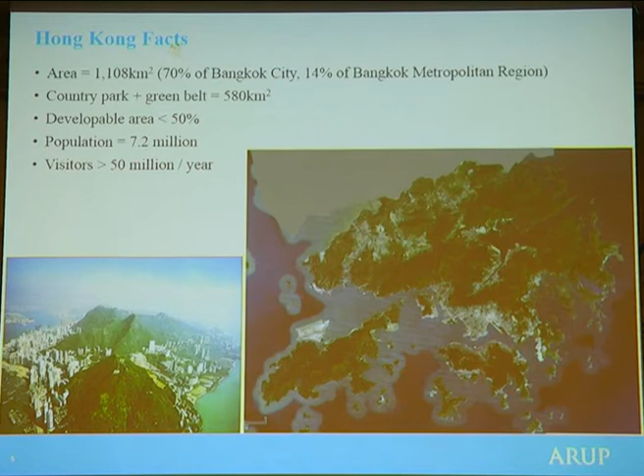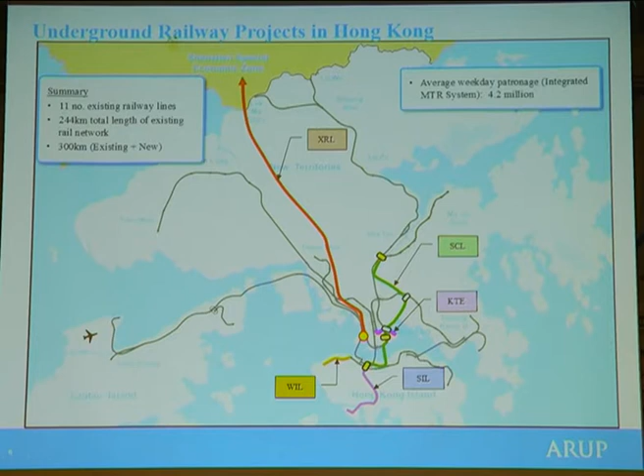Given all this factual data, many developments need to go underground, right? At the moment we have railway systems in the gray line, and currently we are building new lines like the red lines and green lines - they have different names, but these are new railway developments and they are all underground. So major infrastructure is pushed underground - road tunnels go underground, and also some storm drain tunnels, like the Malaysian one, also go underground.

In terms of building projects, Hong Kong is very small, so the government releases land bit by bit every year. It's only about 33 hectares per year, but it's a small place, so this land is divided into different sites around the territory, with many sites coming from this 33 hectares.

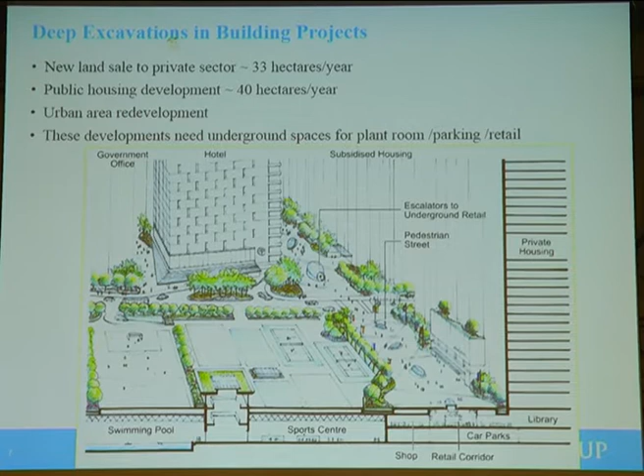The government also promotes public housing, which is around another 40 hectares, and they regenerate new developments from old districts, knocking down low-rise houses to build high-rise ones. Altogether, it's roughly about 80 hectares per year.

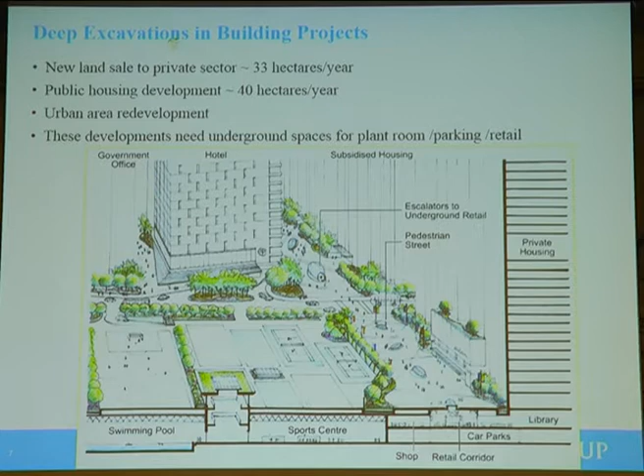For these new developments, most contain underground space, for example car parks, plant rooms, and in busy districts, commercial usage like retail. All of this requires underground construction. In my paper, I showed some common types of excavation works in Hong Kong.

I think the most common one for shallow excavation may be the sheet pile wall, steel sheet piling. In Hong Kong we use a lot of steel, for temporary works they all go with steel. Sheet pile walls have the beauty of high strength compared to the steel weight ratio, so you get very high strength with very little material. It also has the function of reasonable seepage cutoff.

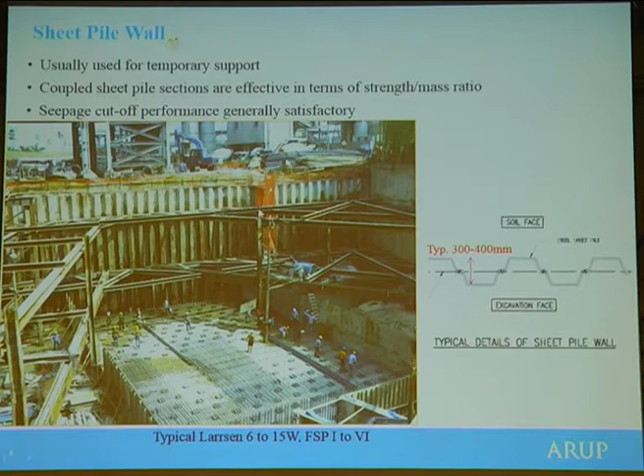For example, this development is near the seafront, and using sheet piling, even with sandy material, provides reasonable seepage cutoff, so you don't need other measures to stop water flowing in. The water table at the waterfront is very high, as you know. They normally drive it in by hammer, pitched by small hammer or by vibrator.

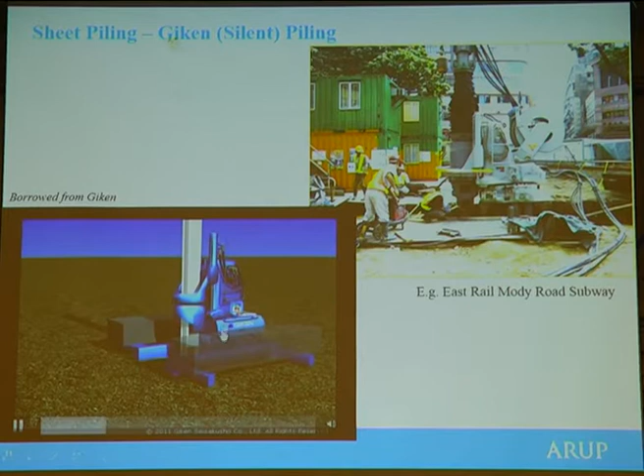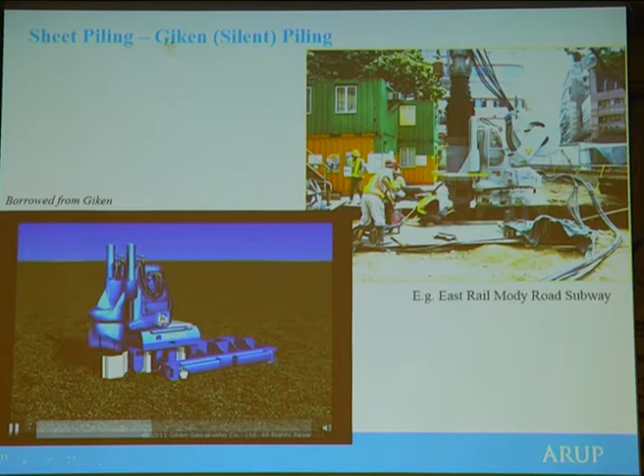In more recent years, this kind of silent piler, invented by the Japanese, has become more popular, particularly for infrastructure in urban areas, because it causes little vibration. It utilizes the reaction from the earlier installed sheet pile - it has clamps, several pairs of legs that can clamp against the installed sheet pile, like this one, to provide reaction to press the upcoming sheet pile into the ground.

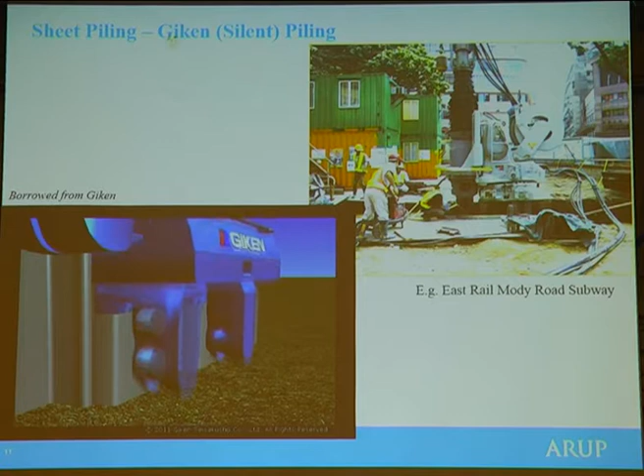It has the beauty that it can be installed in narrow sites. It's also very static - it's just pressed in, it doesn't require any vibration or hammering action. So this has become more popular now in Hong Kong for major infrastructure in urban areas, for example, this kind of site next to old buildings in busy districts.

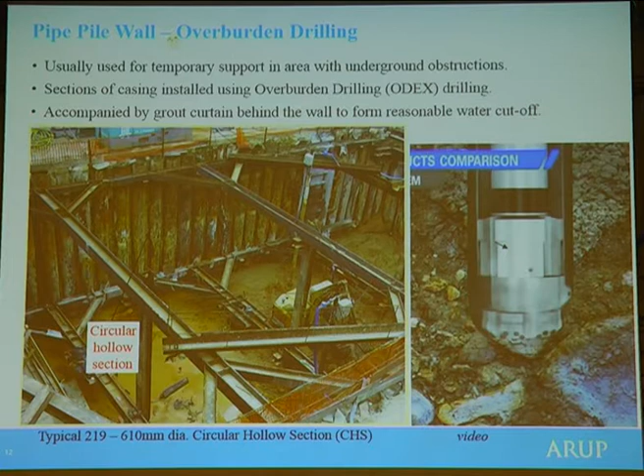Because of the ground conditions, I think the steel pipe wall is perhaps another very popular system in Hong Kong. It's a circular hollow section of steel, brought down by a drill bit through eccentric drilling, so the hole forms slightly bigger than the casing, and the drill bit brings the casing down. This has the beauty of overcoming obstructions like corestones or boulders in the in-situ material, so it's particularly useful in hilly terrain areas.

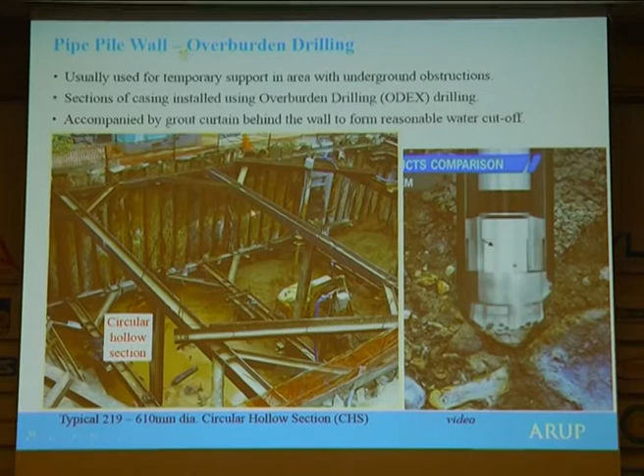Nowadays we use more advanced techniques like the ring bit. Apart from the drill bit itself, the ring also helps to drill - it's attached to the casing, giving it the ability to drill down as well. This ring bit system is more popular now as it causes less disturbance to the ground.

Soldier pile wall is a variation of the former wall. The typical technique is we install the steel casing, then insert the H section, and then withdraw the temporary casing. So the construction technique is actually very similar for soldier pile wall and pipe pile wall.

You may be more familiar with bored pile walls and diaphragm walls. In Hong Kong it's not very common to use bored pile walls nowadays, because of the construction technique I'll tell you about later. In some cases we may use secant pile walls, overlapping the primary piles together with the secondary pile, which has the ability to form an arching effect.

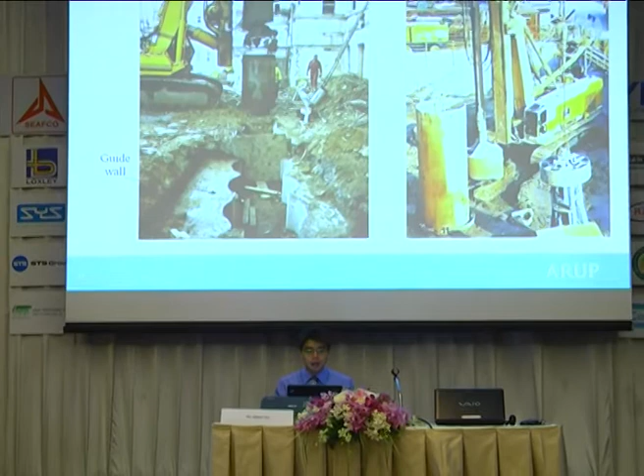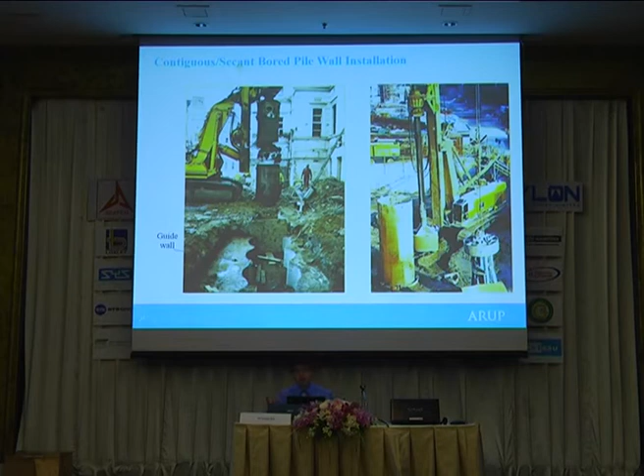For construction of bored piles, in Thailand or other coastal areas, it's more common to use this Kelly bar technique, because of the soft material. So you use the Kelly bar mounted buckets to excavate the material, and then use bentonite to support the bored pile, or polymer to support the bored pile.

But this kind of technique is seldom used in Hong Kong, unless it's a particular site with good ground condition. In many cases in Hong Kong, we have non-uniform ground. So you have boulders, different material in the fill. You then come into alluvium or marine deposit, and then decomposed granite or tuff, and there are lots of core stones down there.

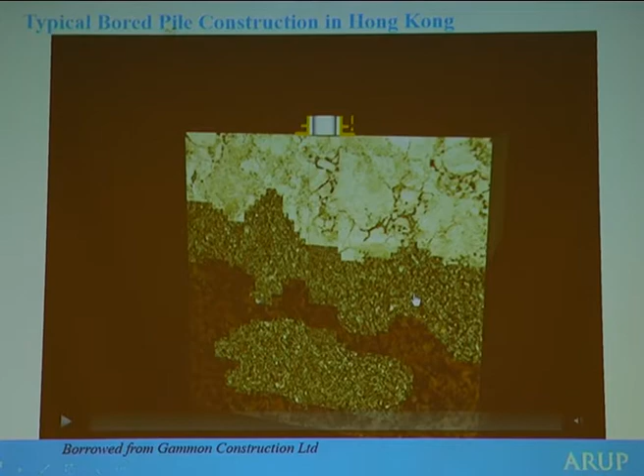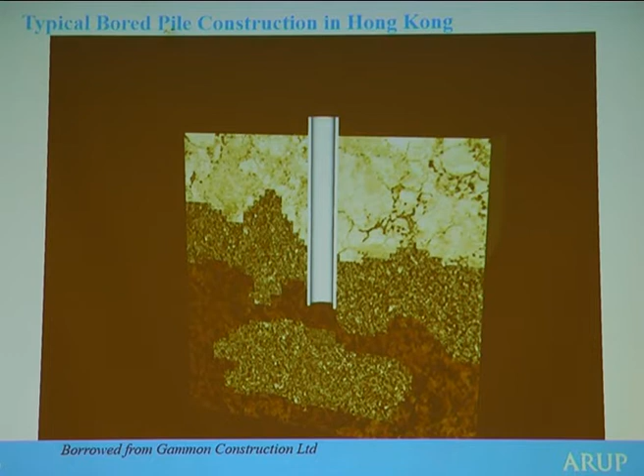So the more common technique actually uses full length casing. All along the bored pile, we use the casing. And then we use water as the flushing medium, and grab through the soil. And when it comes to an obstruction, we use the reverse circulation drill - drill through the obstruction, and then sink the casing again, all the way to the formation level, the founding level.

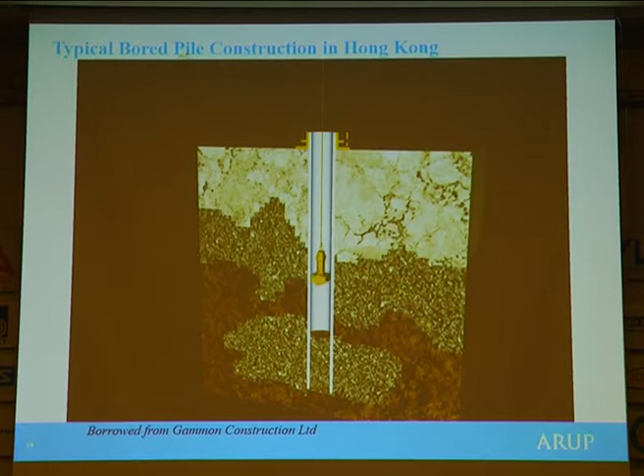So this kind of technique is very safe because you use the full-length casing to support the pile. Because the ground is not homogeneous, if it falls, the boulders would drop into the bored pile, and the hole becomes bigger and bigger. So to prevent the collapse, we use full-length casing, and then after the reinforcement concreting, we extract the temporary casing.

So this kind of construction technique is very safe, but it's time consuming. For example, if you build a 60-meter bored pile, it may take only one shift, maybe 12 hours, at most maybe 18 hours. But in Hong Kong, if you build this same dimension of pile, it may take roughly about 5 days. So it's very time consuming.

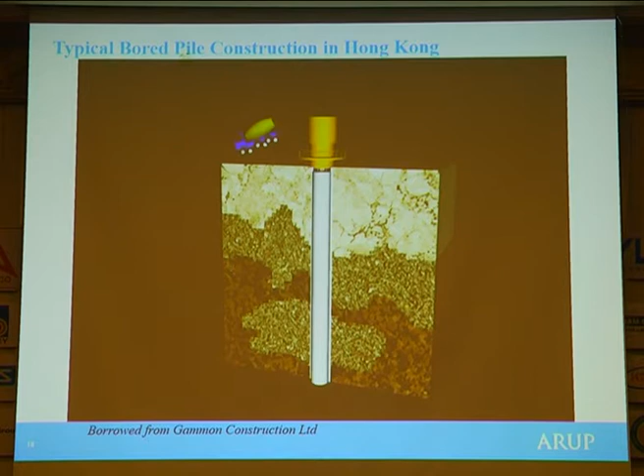That's why the bored pile wall is not very commonly used as the retaining wall, because you need a very large number of piles. For the diaphragm wall, you're also familiar with it because of the lots of MTR development nowadays. It's a linear feature, linearly aligned panels.

So typical thickness in Hong Kong is 800mm to 1.5 meters. The panel length on plan is minimum 2.8 meters, up to around 7 meters.

The construction technique is similar here and in Hong Kong. We use a grab to start with, but because of the material, in some occasions it's very hard, so we may use the trench cutter in that case, as it has a better ability to overcome harder material than the grab tool.

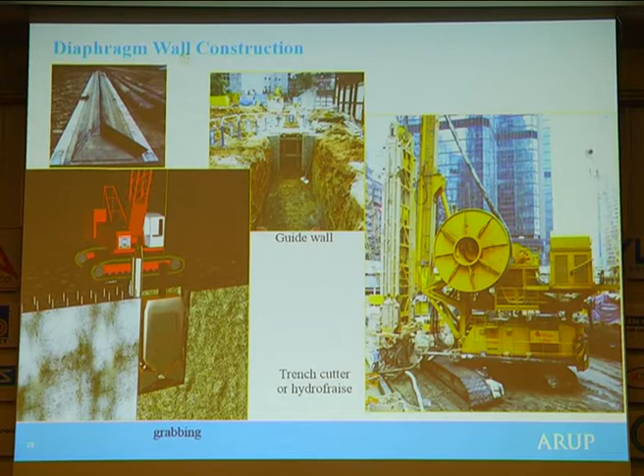So now comes to the support. We talked about the wall - how about the lateral support?

For infrastructure, it's very common to use this type of support, which we call braced support - from this wall to that wall, self-supported within the site. For example, this is a railway station, roughly about 300 meters by 25 meters wide, which gives you a very regular pattern of structures, and you don't really affect the land outside.

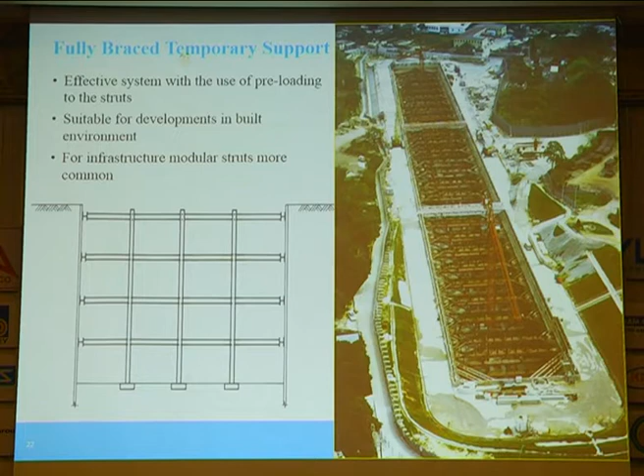So this is very common in Hong Kong, and also in urban areas we cannot have any support outside the sites because next door is already the building nearby. So this is almost like the default supporting system in Hong Kong.

In some occasions we may be able to use anchors, but only for a few sites, for example if we can get the land for temporary or permanent use. Some anchors are actually retrievable - you install the anchor, and then you can retrieve the strands afterwards, so they only leave the anchor body segment in the ground. But the cable strands can be pulled out after. So we have a few sites using this kind of technique, but it's not common.

Top-down construction in Bangkok is also used for some railway stations. You use the slab because it needs to be built anyway in the long term, acting as lateral support, with steel stanchions to support the vertical load from the slabs or superstructure, and then you excavate downwards. This has the beauty of minimizing the use of temporary struts.

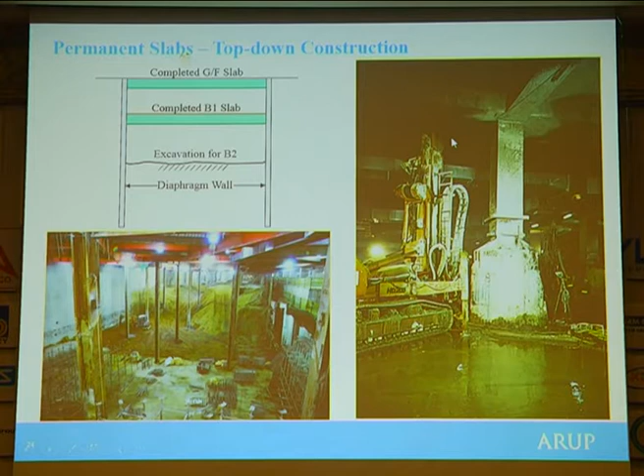In a previous slide I demonstrated the circular cofferdam using a bore pile wall. Actually, more common is to use a diaphragm wall. For example, this cofferdam is for the ICC, the tallest tower in Hong Kong. It's 76 meters in diameter, and we use the diaphragm wall in segments such that they form a circle, utilizing a hoop action to support the wall itself, like a drum.

So actually you don't need any internal structures. These ring beams, actually, they are more to comfort the government official, I can say. In reality, if you do an analysis, these ring beams have no real function—they are too weak compared to the wall itself. But to make things more comfortable, usually we have one or two ring beams inside.

Also you can see from this photo, these are the barrettes, actually the barrette foundation for this highest tower in Hong Kong.

Now comes the design aspect. The design practice in Hong Kong for structural works all follows limit state design—we check for the serviceability limit state and the ultimate limit state. But for geotechnical design in Hong Kong, we still follow the working stress approach. So we do analysis for the working stress condition, and then use a load factor to factor up the results to get the force for the design.

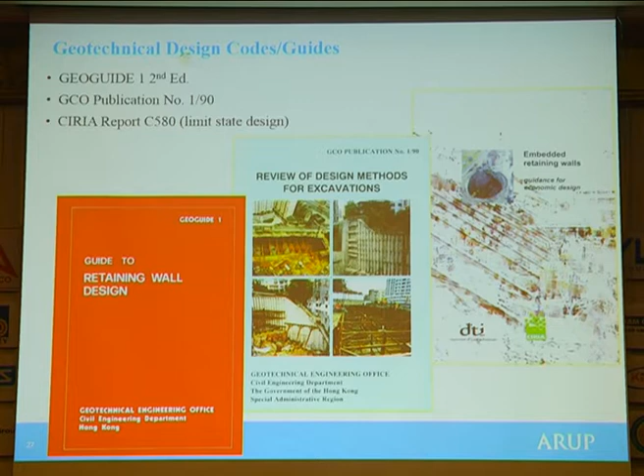More recently—well, not that recent—this was published in the early 2000s, but in Hong Kong we only adopted this kind of code in recent years. This has entered the limit state design age. The CIRIA report was published in the UK using the concept of limit state design, and now it's in conjunction with the Eurocode—all Eurocodes are limit state. So this represents a change of design practice from the working stress approach to the limit state approach.

Unlike Bangkok, which has substantial water drawdown because of historical water use, where pore water pressure drops in the upper sand or lower sand areas, in Hong Kong we are under hydrostatic conditions. In the seafront, the water table is just about 2 meters below ground level. So in typical ground conditions, the groundwater in Hong Kong actually dictates the design of excavation works, because it contributes more than 70% of the force—the soil load is only a small portion, but water is dominating.

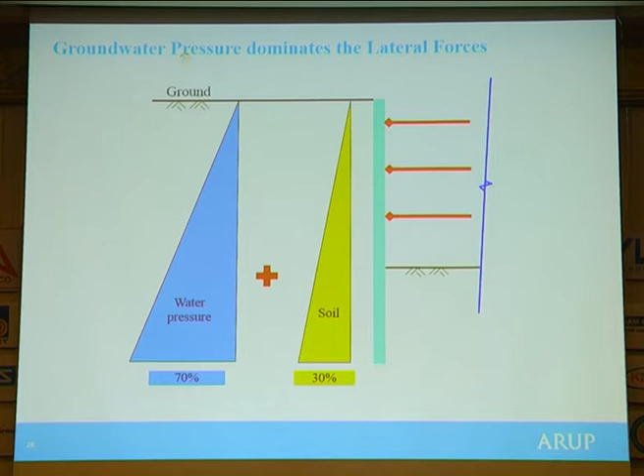There are a few stabilities we normally check. One is the toe stability, toe kick, because there are two issues: one is the ultimate limit state—whether it will fail—and second is whether it will move a lot, which may affect adjacent roads and buildings. So the factor of safety applied is quite high—for passive resistance we apply a factor of safety of 2. Compared to other cities, this is a big value. In particular, in clay, you can never achieve this factor of safety.

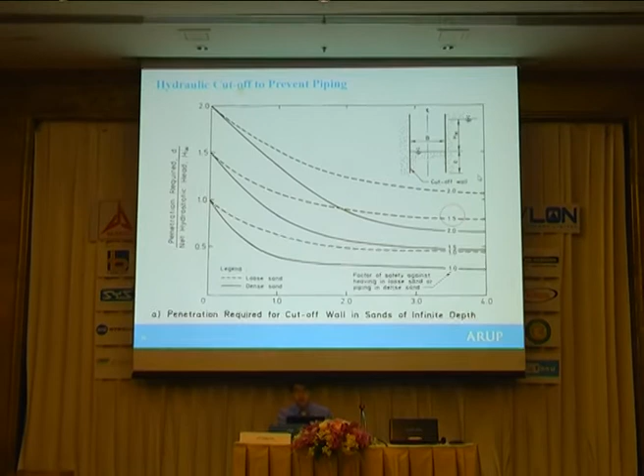Also, regarding water, hydraulic failure is another critical factor, because whether it's alluvium or CDG—the decomposed granite—they are all relatively permeable; they are not clay. So hydraulic failure is another critical case we need to check, and in this case we check for a factor of safety of 1.5.

So in terms of the software, nowadays I think no people will do hand calculation, right? They all go with computer. And this is a kind of like boundary element method. It's not finite element, it's kind of like a pseudo finite element method, you can say. And Frew actually is quite popular in Hong Kong and elsewhere.

It was developed by Oasys, that's part of Arup actually. And it's very quick to run. You can simulate different stages of excavation. Compared to structural design, staged simulation is very important because the lock-in force under every stage will accumulate to a big force compared to the structural design. So it's a totally different concept. And nowadays, I think many people go for finite element, okay?

So this actually has the beauty of being very quick to run. So for the initial design check, we may use this software. And then after that, if we need more accurate estimation of the ground movement outside, and what's the effect to the surrounding, then we may go into finite element. Some of you may be aware of Plaxis, for example.

And then we have other software like Safe or Flac, for example. So the beauty of this kind of software is it's able to give you the deformation outside the retaining wall, such that you can estimate the effect to the surrounding ground, to the surrounding structures, etc.

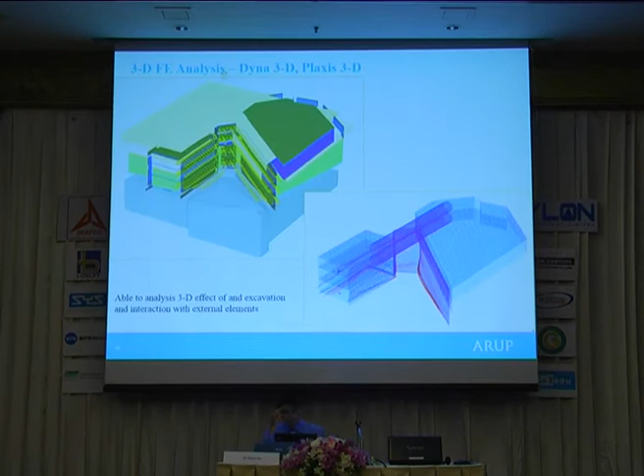First of all, programs in Hong Kong need to be pre-approved by the government. So such a system is very complicated because you need to validate your software before you can use it. So imagine, how can you verify a 3D analysis? You need to use another software to verify it, right? So it enters into a very complicated situation. So in most cases, we use 2D analysis, and in some occasions, we may be forced to use 3D analysis.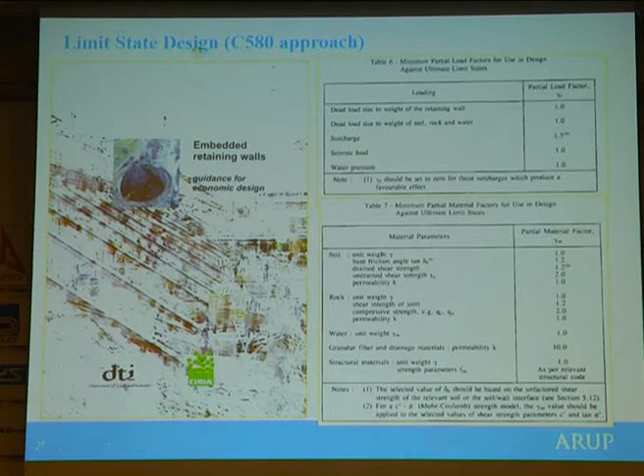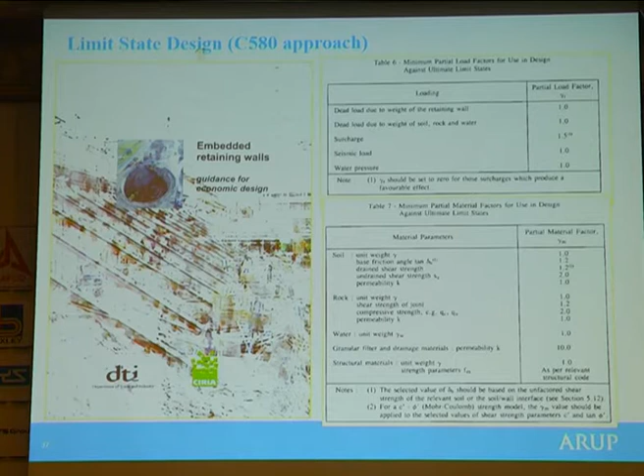So I'll briefly talk about the limit state design approach in this C580 approach, published by CIRIA Report in the UK. So we have our own partial factors, okay? In Hong Kong, we adopt our own partial factors to replace the partial factors stated in the code. These factors basically follow the red book I showed earlier, that's the GEO Guide 1. So we factor down the strength, and then factor up the loads, for example, like surcharge next to your excavation, okay? So that gives you the ultimate limit state.

So we enter into this part. We carry out the ultimate limit state with the partial factor parameters, and then some construction considerations in the excavation as recommended by CIRIA Report. And then we get the ultimate limit state forces in the props, in the walls, etc. And also we study the toe-in requirement.

So now we are not checking against a factor of safety. We run the ultimate limit state analysis, and then test where the wall should stop before it fails in the finite element analysis or in Flac analysis, okay? In any kind of computer analysis, we test out where the wall should stop, and that is the requirement we need.

And this is the ultimate limit state, and then we also check the SLS, the serviceability limit state, to estimate the ground movement, actually the movement next to your building, and then the SLS forces. And how to decide the members is to compare this force from the ultimate limit state with the SLS, so the works would not go wrong in terms of the structural member design, etc. And of course, compared to the conventional methods, the conventional method will only check this, okay?

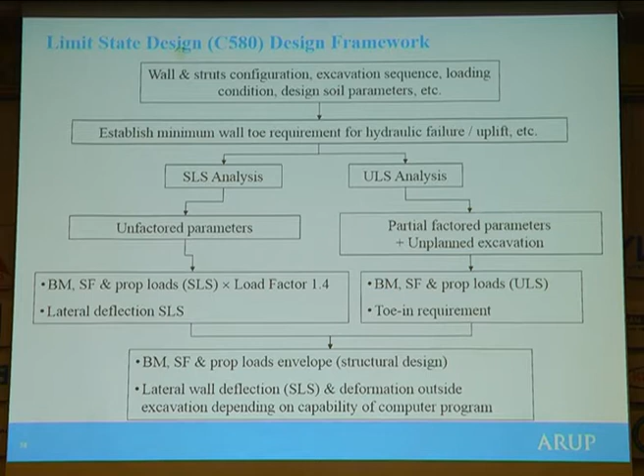We check the SLS, and then use the load factor to calculate the member, and then we omit the ultimate limit state, okay? So this approach becomes more robust in terms of the design, and it's an increasing trend to be used in major excavations.

So for example, like this one, the beauty is, if we have a toe-in, like this sheet pile wall, we have an excavation of -6, that is 11 meters below ground. And then the toe actually goes another 10 meters below the final formation level in sandy material here. So we test, in the ultimate limit state, the toe-in from 10 meters to 9, to 6, to 5. Actually, it's still stable until it rises to around 4 meters, okay? If you raise it further, then the wall will fail. So we test for the toe, and then we also study the bending moment forces, okay?

It doesn't change much, okay? So this will give you where the wall should stop, as the bare minimum. That's the first requirement. The second requirement is the groundwater cutoff, because when you raise the toe, the path of seepage gets shorter, and it may enter into a seepage problem. But in the former slide, you can see that in this project, because of the requirement, they have a grout curtain anyway at this portion. So if you raise the toe, the grout curtain actually goes higher up, so it compensates and overcomes the seepage problem.

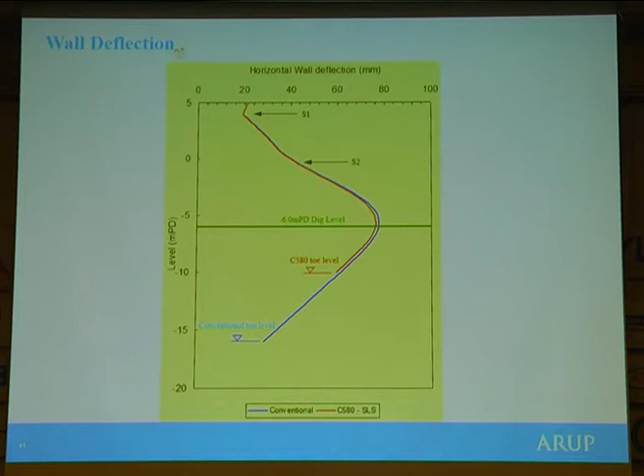So in this kind of project, we can actually save on the toe requirement. And remember, this is not just about the material, because in Hong Kong, as I mentioned, there are lots of obstructions in the ground. So if you can drive the pile, make the wall shorter, it has a big advantage: you don't try to overcome the obstruction at greater depth. So it's a program issue and a risk issue actually, not just saving material.

So now I'll briefly describe one project which is undergoing at the moment. We have adopted 3D analysis. This is very complicated. If you go to Hong Kong and you need to go to Ocean Park or other places, you may change from the subway to bus. So this is the station, an underground station actually, 5 level basement.

And then there's kind of an interchange station for 2 lines. One we call the Tsuen Wan line. The other one is the Island line. So interchange of 2 lines, and then with a commercial basement already, all in blue color here.

So these are the old tunnels formed by the compressed air method, excavated. So within this area, we need to build another station, a new station. Actually it's deeper, occupying the entire space, and then we go underneath the existing station by another 2 stories. So the brown color, this is 5 levels to provide an interchange for another 2 lines.

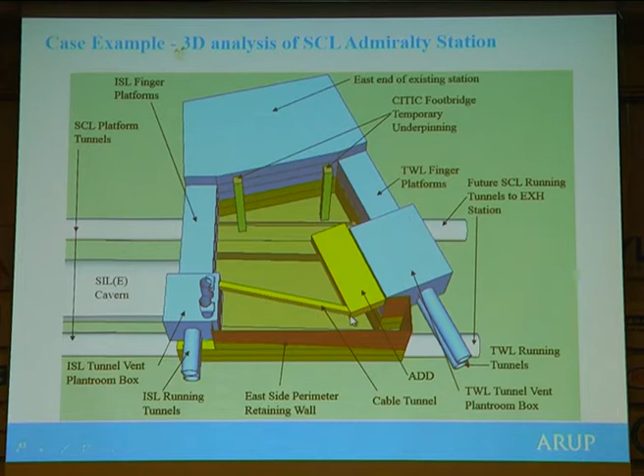So totally there will be 4 lines interchanging at this station. It's the busiest station in the future. The line will go into the right line and then allow for another line to go out in the future. So the cross section is like this. It's very deep. The current station or platform is at roughly -18, that is about 22 meters already.

And then we need to go all the way from the ground to 40 meters, from 4 to -36. So the geometry is very tricky, right? You have an existing structure like this, you have another car park there, you have some areas we need to stop, and we need to minimize the on-grade. This car park actually is on-grade, they are not supported by piles.

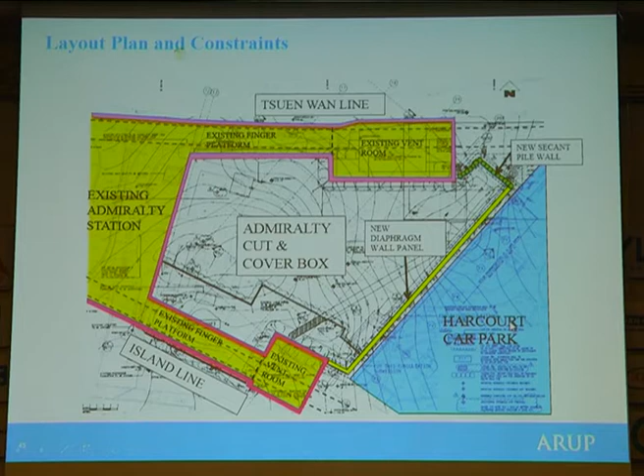So we need to carry out some complicated 3D analysis to look at the corner effect. Actually, we try to estimate the movement and the forces in a more accurate manner. So this kind of analysis.

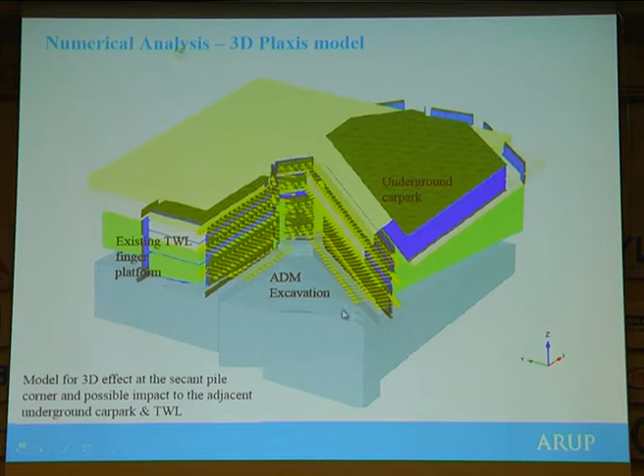So this is the bedrock, and we need to actually cut into the rock. So this is the deformation shape, the deformation of the ground, and behind the circular thing is the existing tunnels, and the existing platform for that line. So deformation shapes, the movement extent, for example deformation extent, and the stresses. This stress is related to the stability of the existing platform, which is in use during the time of construction.

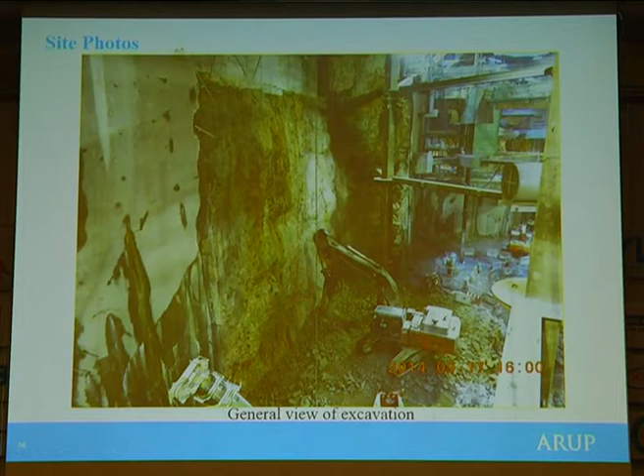So this photo, this is the existing platform, the bottom of the platform actually. So we need to excavate all the way down to somewhere here. This photo was taken last month. So also we need to mine underneath the platform, so we need to support it, underpinning the bridge. But this is all underground, 20 meters below ground. So we need to underpin the platform and then excavate underneath it.

One distinct requirement in Hong Kong compared to other cities is the site supervision requirement. In some countries like China, the designer produces the design, and a so-called independent construction supervisor will supervise the work. But the supervisor may not even know what the design is - it's independent because contractually the responsibility lies with an independent company, but that company may not have the knowledge on this kind of design.

So Hong Kong takes a very different approach. The designer himself needs to take care of the supervision role, and looks through the construction process. Even though the contractor may have their own alternatives, the designer knows the site constraints and the entire project.

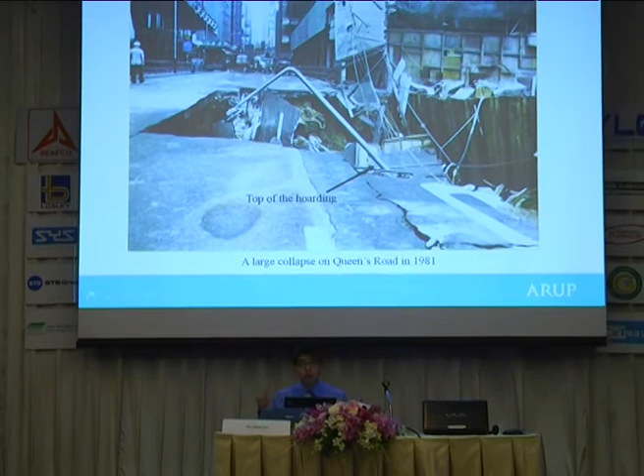This is one case where the hole actually occupied half the length of the road. Another case was in Central - this one is more tricky because it's located in the financial district, so major disruption to traffic causes trouble. The depth of the collapse was quite deep, about 4-5 meters.

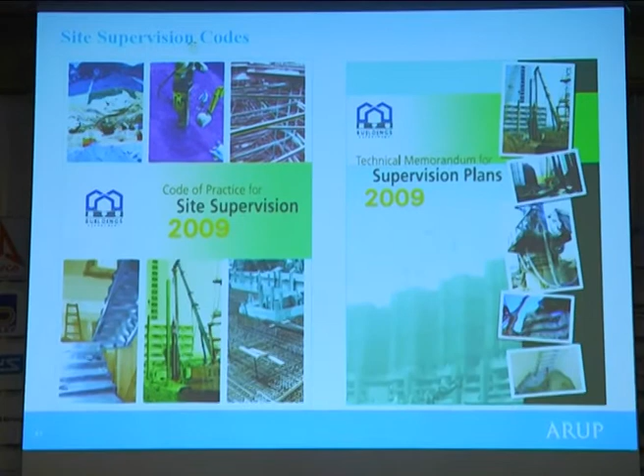So the conclusion from this kind of study is that it's about workmanship - meaning the site control on site. Either the contractors skipped some length of the pile, not driving the wall deep enough, or the control system had problems over the entire process.

After that, the government published the supervision code. The latest revision is from 2009, and this document needs to be read together with another document - they come together. That document defines what kind of construction works we classify as building works with significant geotechnical content, and that geotechnical content needs to be supervised by the geotechnical stream of people, while other works are supervised by the structural stream.

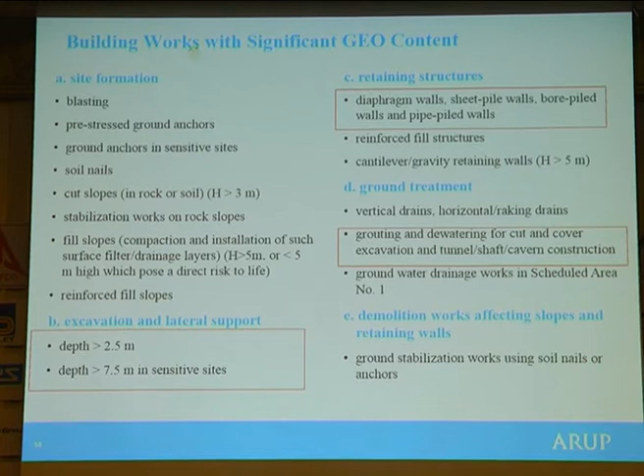So in excavation works, like diaphragm walls, sheet pile walls, excavations, grouting - everything needs to be supervised by 2 streams: one is the structural stream, one is the geotechnical stream of people.

I won't go through this in detail, but how we identify how many people we need for a particular site is measured by the value of the work. 4 million is the basic value - for example, if I have a diaphragm wall worth 8 million, and the basic value is 4 million, that means I need 2 people to station there to supervise the works.

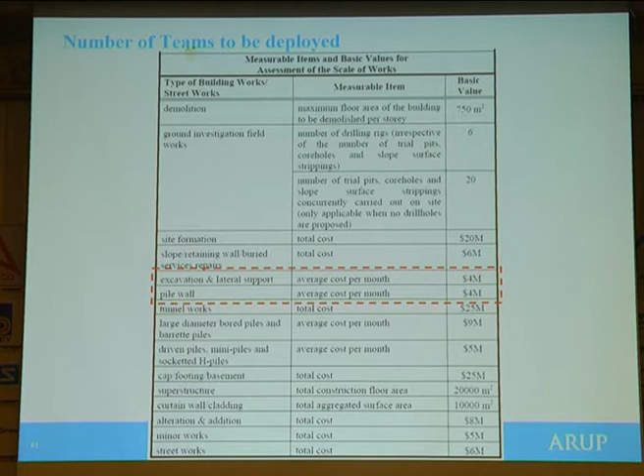That's quite a stringent requirement actually. Even if the site is small, since the price index in Hong Kong is very high, you do need a lot of people to supervise the works.

In the organization it looks like this - from T1 to T3, we call it. T3 basically is a graduate with 2 years experience, so a junior engineer you can say. These people are stationed full-time on site, and the number of people is calculated based on the previous slide.

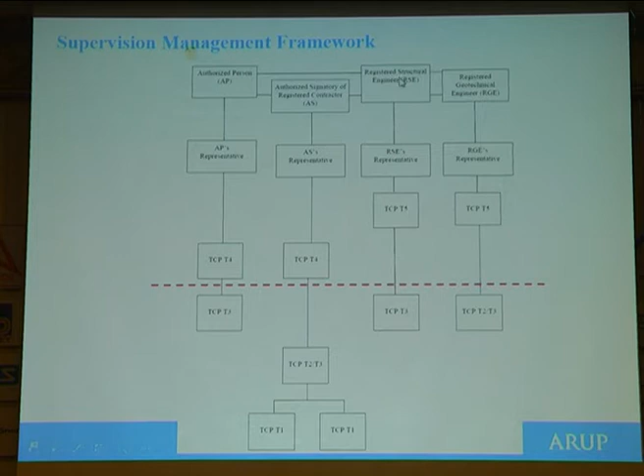And then the T4, T5, this more representing the professional engineer, like the chartered engineer that may have 1 or 2 years experience. So these people will visit the site on a periodic manner, usually weekly. So every week, the senior engineer needs to visit the site once in order to check whether the design has been implemented on site. And then on top of that is a more senior person, like the registered geotechnical engineer. Currently, I think altogether there's only around 70 RGE in Hong Kong, and roughly about 300 RSEs. So the frequency is like that.

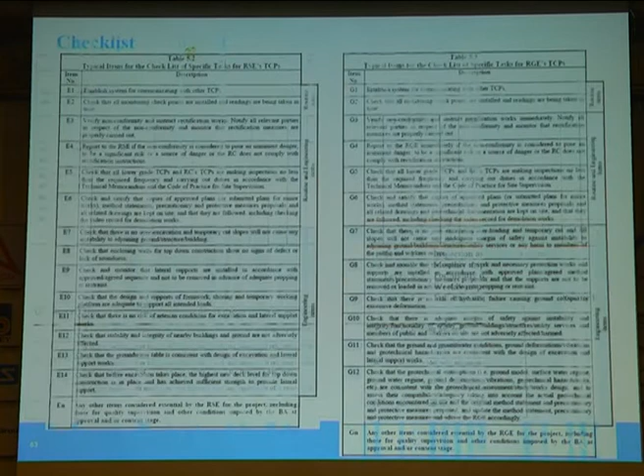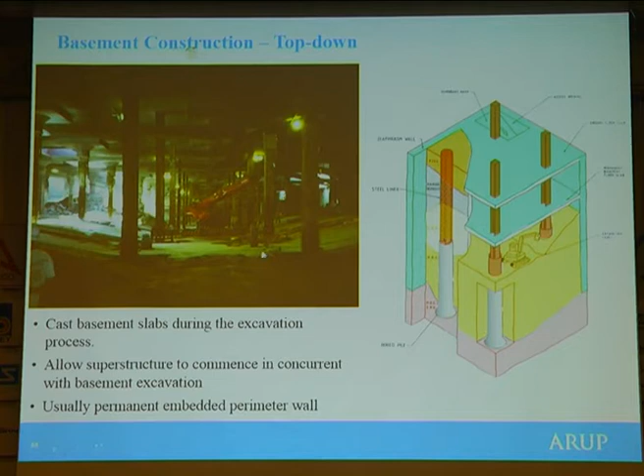I just want to highlight a few key observations in Hong Kong compared to other cities. Top-down construction is preferred in some projects, but in a very congested working environment, it's not very popular. The most popular one is still bottom-up construction of the basement - we excavate all the way to the bottom level, then construct the base slab, and build all the way up. One particular reason is that in Hong Kong, land price is very high, so when the owner or developer gets the land, they want to start construction already. They will build the wall, and as long as they know the depth to go for, they can build the wall, go to the depth, and decide what's inside later. They can have a bigger or smaller footprint - they can adjust. So bottom-up construction gives the developer more flexibility to design the final building later on. That's why it's far more popular in Hong Kong.

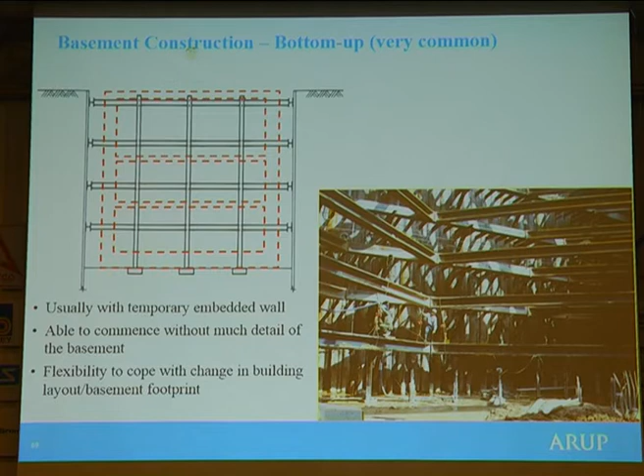For movement limits, no people in Hong Kong would like to see cracks in their buildings, or even in low-rise houses, roads, or drying out of their wells. So this becomes big news - even a tiny crack becomes big news in the newspaper. So the government imposed very stringent requirements. For example, for ground movement in a deep excavation, the allowed value is basically 1 inch. This came from a very old rule of thumb from when the British were governing Hong Kong, and nowadays we still use 1 inch. But in the old days, excavation was very shallow - for a one-level basement, 5 meters. Nowadays we're talking about 30-meter or 40-meter excavations, but the rule is still the rule. So it's a very demanding requirement.

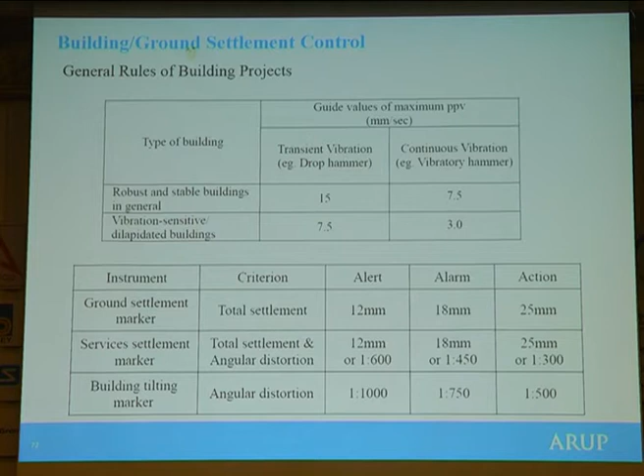So the consequence is we need to increase the stiffness of the wall or other members. Even for infrastructure, the green zone is what we're looking for - the maximum value in some areas is perhaps 50 millimeters. This is already better than building projects, but for infrastructure projects, it's still low, what can I say.

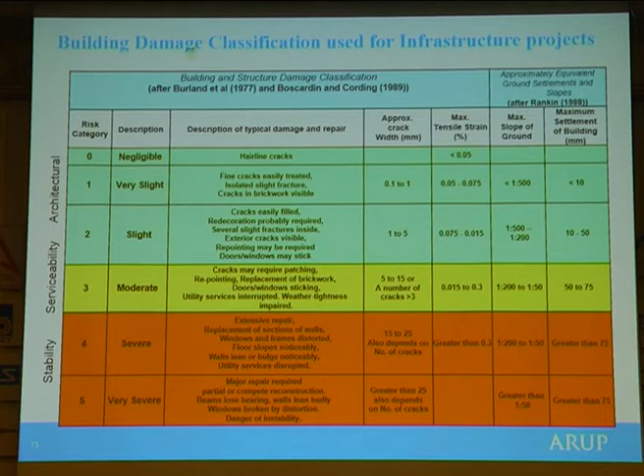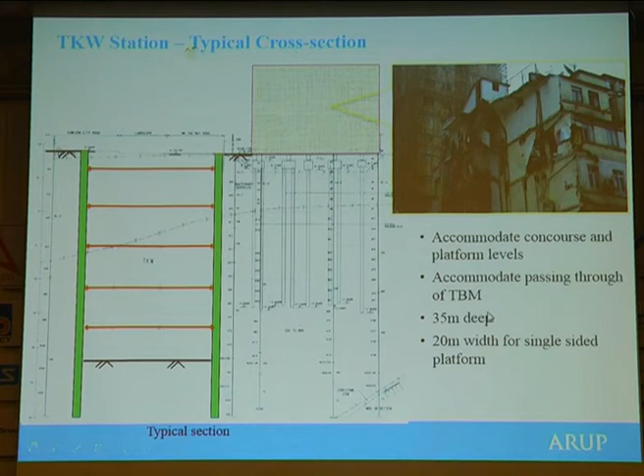So this is an example of a new railway station currently under construction. Only a single tunnel comes in, meaning double tunnel - one below, one up. So the station is very narrow because it needs to fit into a narrow street. It's very deep - we're talking about 35 meters deep, in order to accommodate 2 platform levels. And the buildings next door are not in very good condition. So we need to provide a lot of cross walls, with a diaphragm wall, and then some cross walls - these are not permanent structures, these are cross walls used before you excavate. So a very heavy duty wall, I can say.

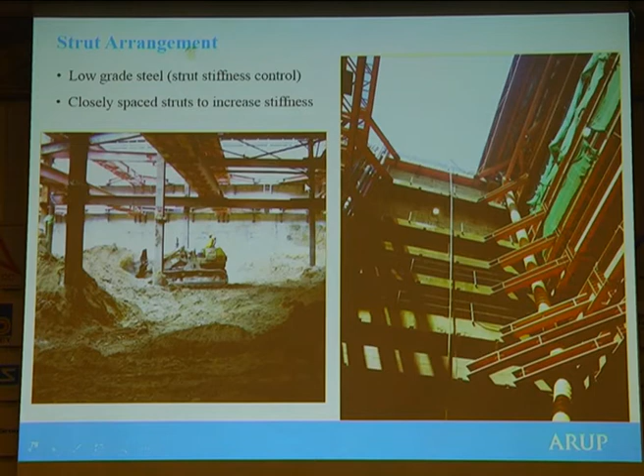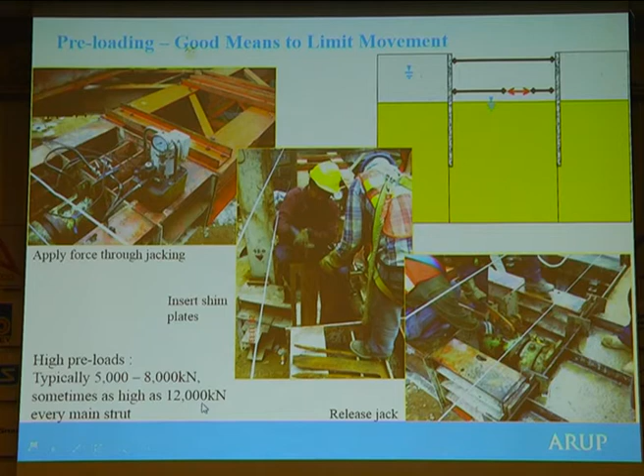In Hong Kong, they provide modular struts, heavy members that are prefabricated and then joined by bolts on site. They are very heavy duty. You can compare this guy with this strut - very large member. The consequence is we also need very heavy, very strong preload to control the movement. Sometimes the struts may go to 1,200 tons per strut. This is a very high preload we're talking about to control the movement.

And one critical issue - seepage. I mentioned the groundwater table is very high, and it comes with sandy material. For example, this development is near a seafront. This is not our project, another project next door actually.

We saw the failure. They were almost ready to cast the blinding layer, cast the cap in part of the site, and in one weekend the entire site flooded. The excavation from this level to that level is about 13 meters, and over 2 days the water depth went up entirely. You can't stop it - there's no way to stop the water coming in because it's next to the seafront. This kind of failure, if it happens, is quite a dangerous situation.

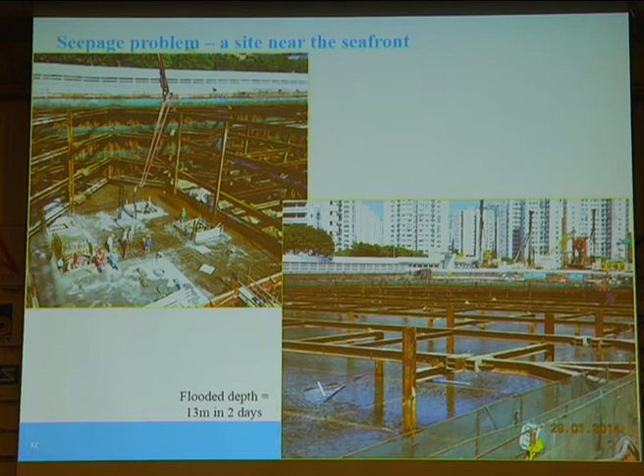If you have workers working inside, there are a lot of plants inside, and they all get submerged into the water. What we suspect happened in this case is the actual seawall extent may be wider, so some sheet piles hit an obstruction and had some defect. Later on, the water just connected from the sea through very permeable rock fill, all the way into the excavation, and there's no way to stop the water from the sea.

So this kind of situation occasionally is very critical for developments near the seaside.

We also make extensive use of monitoring instruments, because the distance between the development and the next existing developments is very close, and for infrastructures, they affect a lot of the urban area. So a whole range of instrumentation is used. For some important projects, we also use the automatic deformation monitoring system - that's the electronic theodolite that will survey the targets at defined intervals.

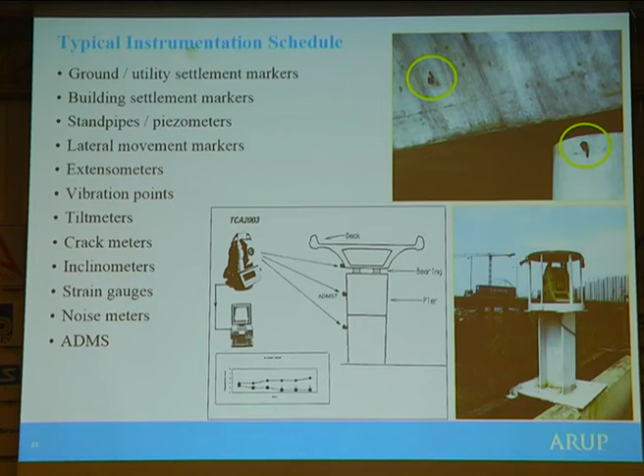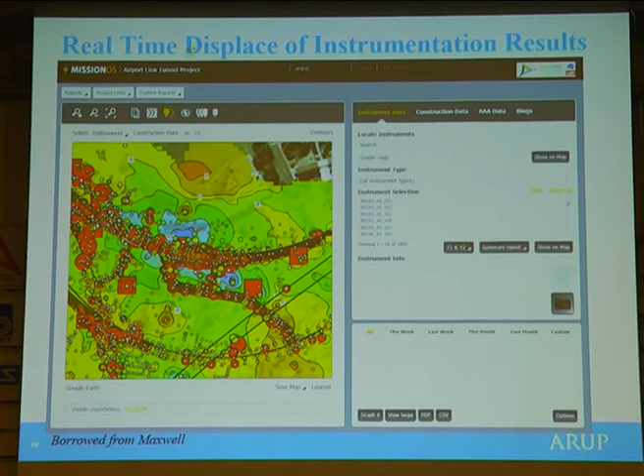Different instrumentation firms provide software to display the results in real-time, and they also send out SMS. I receive many SMS every day, when readings reach the action level or whatever level, in infrastructure projects of course.

Now let me talk a little about future underground projects. In Hong Kong, we are lacking flat land. We are limited by reclamation - when we try to reclaim, environmental groups come out and protest, so we can't do a lot of reclamation. We have a shortage of land.

However, as I showed you, Hong Kong has hilly terrain, and there are lots of reserves in this area - not on the surface, but underground. So this is the initiative to go underground. In the future, several years or ten years from now, very likely we will have more facilities put underground into the hillside. Arup is studying the entire cavern strategy for Hong Kong - where to put them - and there will be some pilot sites selected and turned into real projects in the upcoming few years. This is one of the major initiatives.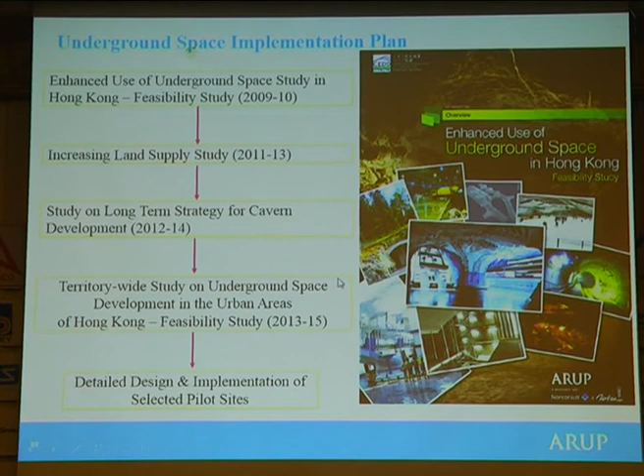Another initiative is that railways will never stop their development - they keep adding lines into the existing ones, and all these lines are mostly underground. So in this aspect, we are talking about cavern formation as well.

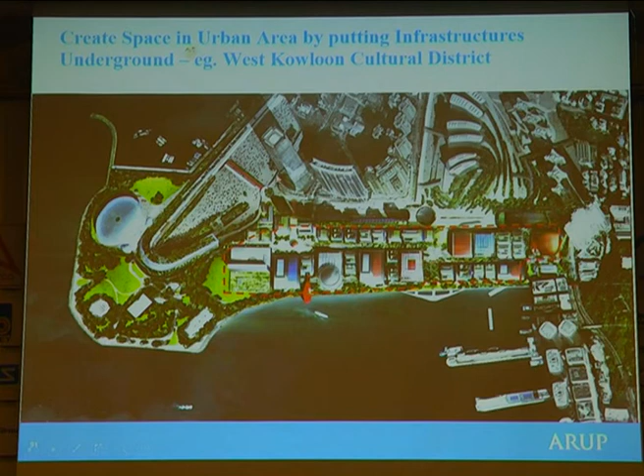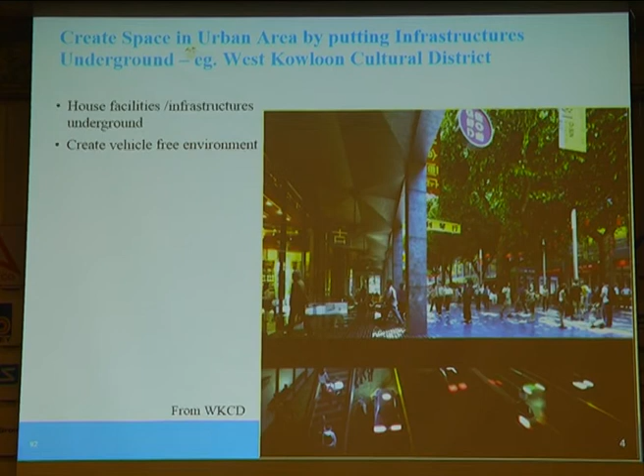In urban areas, in some new developments, we need underground space for car parks and other uses. In some areas, like the West Kowloon cultural district area, it's a big site - this is the ICC tower. The concept or scheme is to push all the traffic underground and lift the ground level, so there's no car at all. People can enjoy walking around and enjoy the area entirely by foot. If they need traffic, they can go underground. This kind of initiative is coming in Hong Kong.

Lastly, I'd like to mention the digital environment. Nowadays, for building projects and M&E projects, they talk about BIM - building information modeling. In civil and geotechnical projects, we also are entering into build environment modeling as well.

For example, like this project, if you look at this topography, it looks like a villa development over the terrain, right? Nothing very special. But if we do a simulation of the temporary situation, it actually involves almost a 40-meter cut into the hillside in order to build the basement structures to allow the ramp to go up.

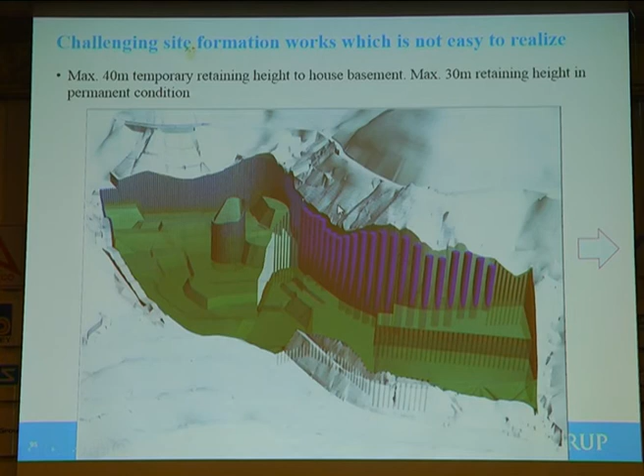This kind of site formation works is difficult to realize from 2D drawings. If we put it in 3D, it becomes much easier to understand. So like this one, if we...

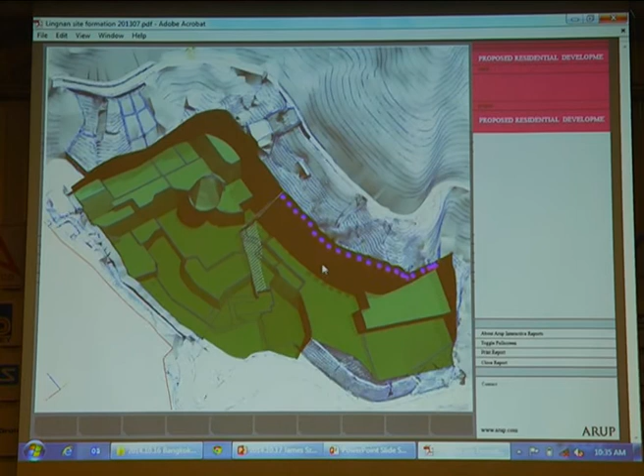If we produce this by GIS, you can turn around and look at the different formation levels. You see the shadow, the higher level, slope cut, lower level, and then deeper level, and the elevation of the wall, toe in, etc.

This kind of 3D software is not very difficult to use, but it's very powerful, allowing the designer as well as the client - most importantly the client - to visualize what it looks like. They can't actually visualize from 2D drawings.

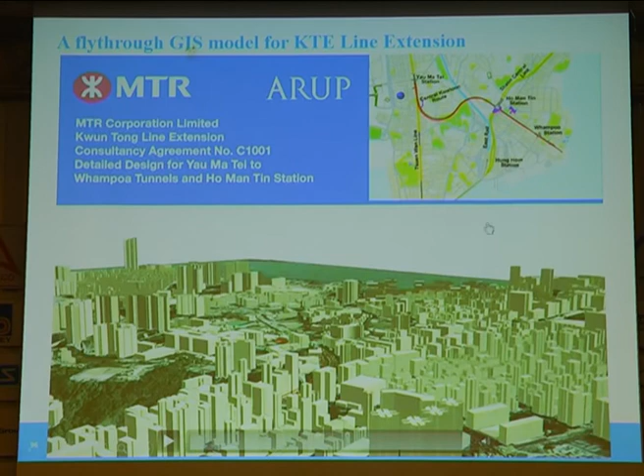So this will become another norm. In every project, some of your projects also have visualization by flying through video, like this, with boreholes nearby. You can integrate the existing information into this kind of 3D model, like the existing piles, supporting piers, the boreholes, the ground conditions, and the terrain above ground as well.

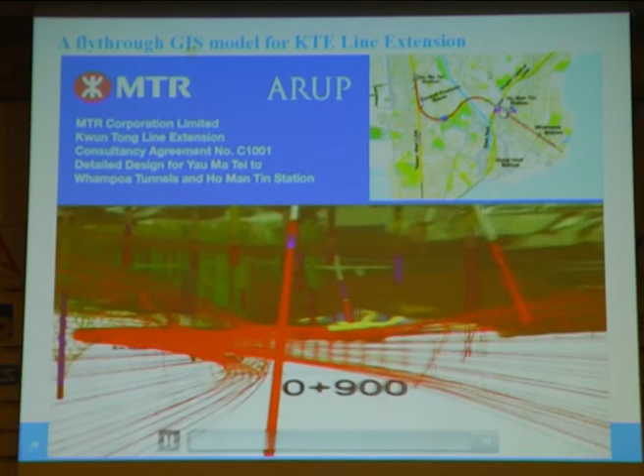So this one is for another major interchange project. I go all the way to here. This one is more tricky.

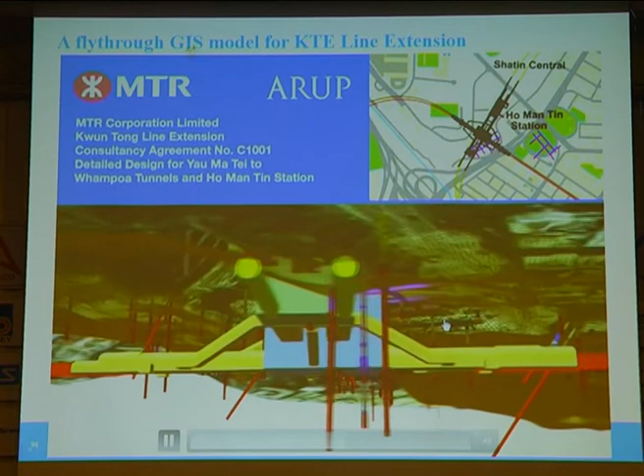In a 2D drawing, for this kind of underground network, it's not easy to visualize. So if you turn it into a 3D simulation, this will give you a very good idea of what it looks like after all, in the interchange of the two stations.

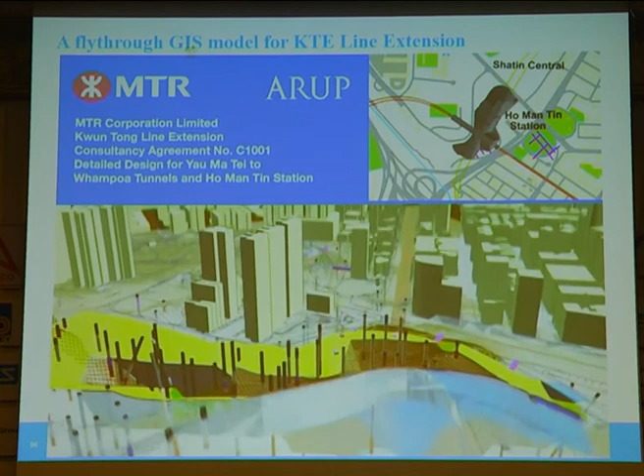This kind of planning tool helps the designer see what the critical area is that needs to be analyzed or looked at. Once you produce the topography, you will know where actually the design doesn't work.

This is the station I talked about, this major hill cut. This time we don't need any vertical wall - we try to do an open cut. We are talking about a 50-meter deep excavation in the hillside.

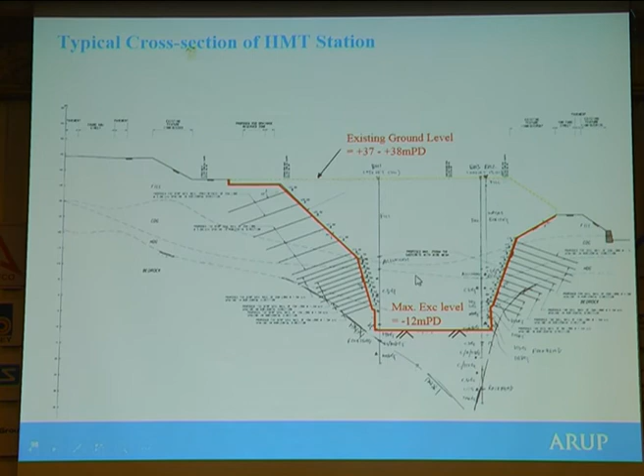And we use some fiberglass soil nails. Actually, the fiberglass will allow the pile later on for the property development to penetrate through. So that's one major advantage.

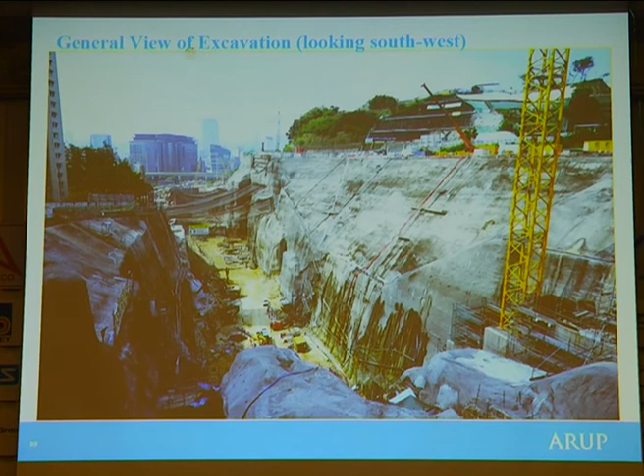And this is the cut when we look down to the south, and look to the north. So this is the building next door - what does it look like? It's quite close to the 3D simulation from day one, actually.

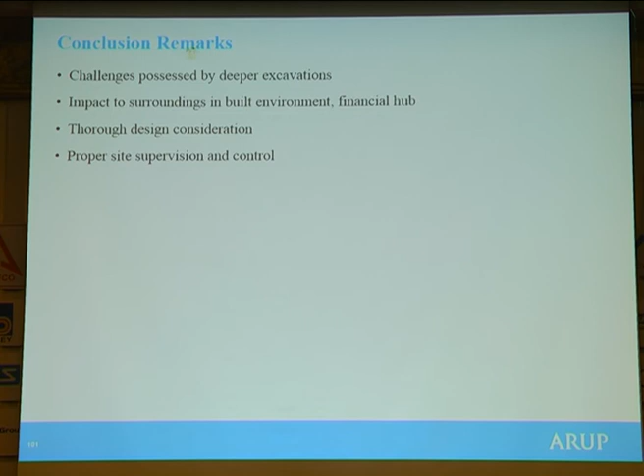So this is my last slide. In Hong Kong, I just gave you a feel of what the ELS works look like. It may be different to a certain extent from your projects here, but both of us have different challenges. In Hong Kong, there are lots of challenges, actually - not the design itself, but designing to suit the constraints, to suit the movement limits, etc. That gives you a kind of headache in order to bring it through.

We also have more advanced techniques to deal with the complicated constraints, like 3D analysis, like simulation, etc. And definitely we need good engineers who can appreciate the constraints and apply appropriate simulation or analysis for the complicated ELS as well, to ensure safety.

Finally, it's the quite distinctive supervision control in Hong Kong that also enhances safety. In recent years - 10 or 20 years - we've seldom seen any failure. Even in the case of flooding I told you earlier, the wall itself is very stable. Basically, when water comes in, the excavation actually becomes more stable, before you pump the water out.

Lastly, one good thing in Hong Kong is all the design codes I've shown you are free to download. You can go to the buildings department or CEDD website, and there are lots of publications - they are all free to download in PDF version. So thank you for your attention.